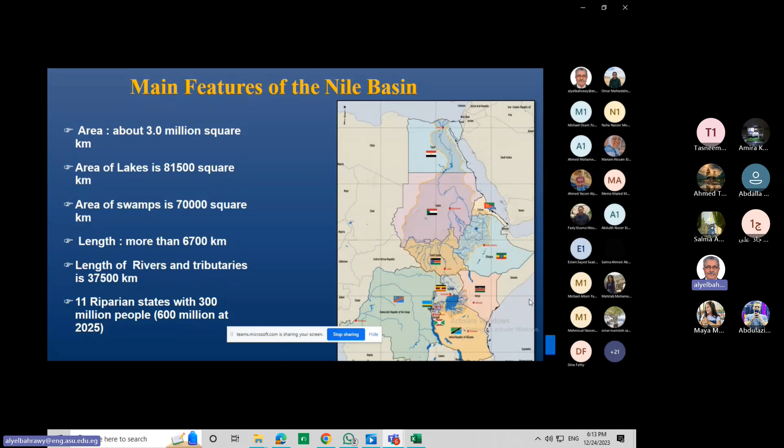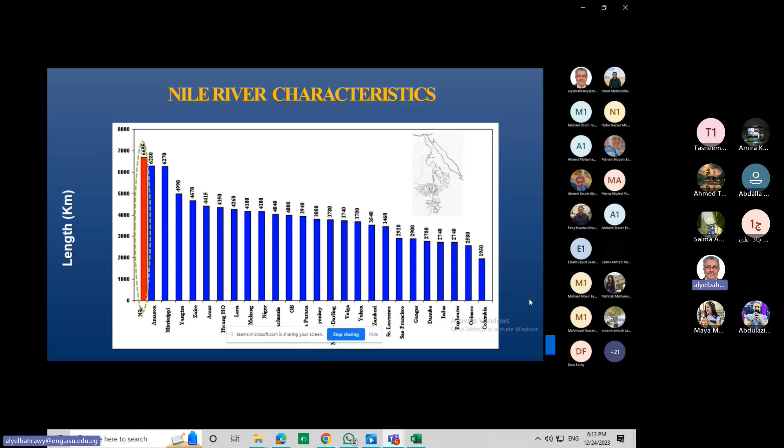Although the Nile is the longest river in the world, unfortunately, when it comes to the river discharge, it is among the least. We talk about 84 billion cubic meters coming in at Aswan.

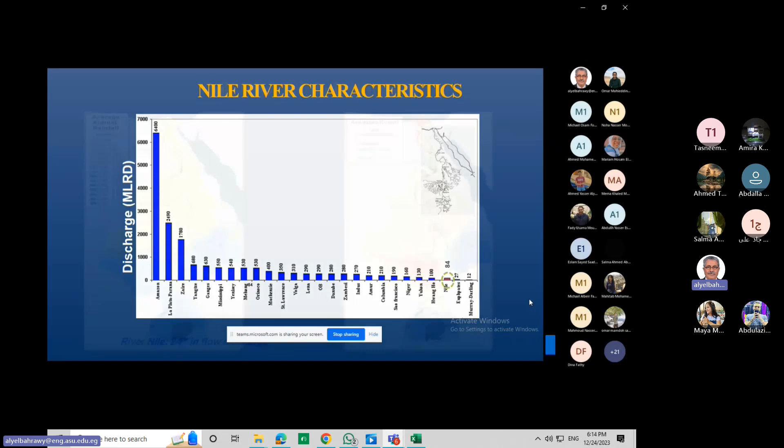We can call the Nile Basin a very complex basin. If we look at those two maps, we can understand why this complexity. On the left-hand side, when you see the Nile Basin map and the average annual rainfall, we find that there is a big discrepancy and a big variability in the rainfall. While Egypt and Sudan are almost dry with almost no rainfall, we find that the Blue Nile area in the Ethiopian highlands and the equatorial lakes plateau are very rainy.

So this puts different interests in the river. While we need the river for agriculture and for the livelihood of the people, the focus on this river in the upstream is more on hydropower development and hydropower production. This is one of the important factors of complexity of the Nile Basin.

At the right-hand side, we can see also the available runoff. We see that there are some swampy areas, and the runoff is low in the Nile Basin in Egypt, while we are mainly focusing on the rain in the Ethiopian plateau and the equatorial lakes plateau as well.

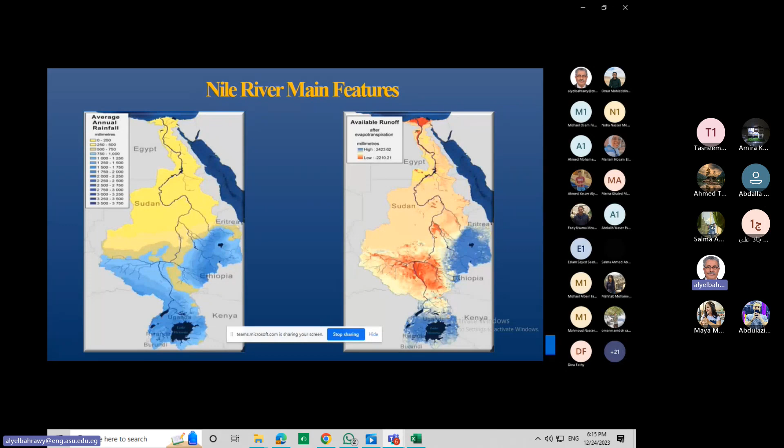Another factor of complexity is a term called the dependency ratio. This term is identified by the FAO, the Food and Agricultural Organization, as being the part of the total renewable water resources originating outside of the country. So it is the percentage of the external renewable water resources over the total renewable water resources.

In short, it explains how much you depend on water from outside of your borders. When you compare the Nile Basin countries, we find that Egypt has the highest dependency ratio, with 97% of its water coming from outside of its borders. While, for example, we find in a country like Ethiopia or Rwanda 0%, which means that they are controlling their own resources. They don't depend on water sources from outside of their borders.

And here, again, it explains the complexity of the basin, because we are not all at the same page with regards to the dependency ratio.

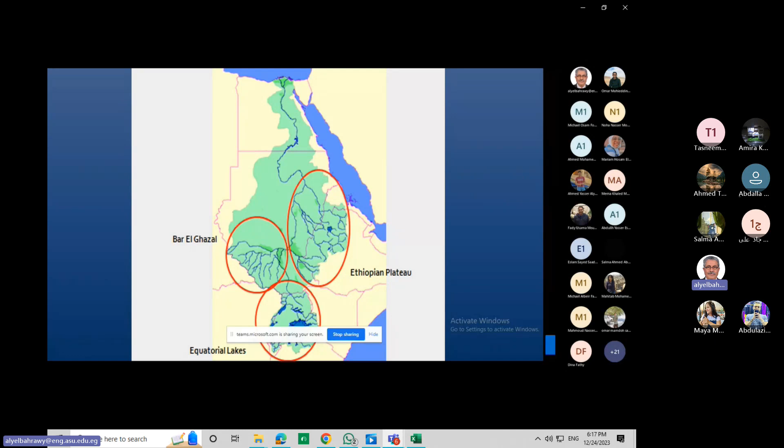This map explains the three main plateaus of the Nile Basin: the Ethiopian plateau, where the Blue Nile comes; the Equatorial Lakes Plateau in Lake Victoria and the Equatorial Lakes; and the Bahr el-Ghazal Plateau.

This table explains the water situation in the Nile Basin. In the Equatorial Lakes, for example, it receives a mean annual rainfall volume of about 527 billion cubic meters. From Bahr el-Ghazal we receive 544 billion cubic meters, and from the Ethiopian plateau, 1,076 billion cubic meters.

The mean annual rainfall volume at the Equatorial plateau is 527, but only 15 billion cubic meters flow into the Nile. In Bahr el-Ghazal, none of the rainfall volume flows into the Nile; it's all in the swampy areas of the Sud region. In the Ethiopian plateau, out of the 1,076 billion cubic meters that fall, only 79.5 billion cubic meters flow outside of the plateau. This is at the source of the basin.

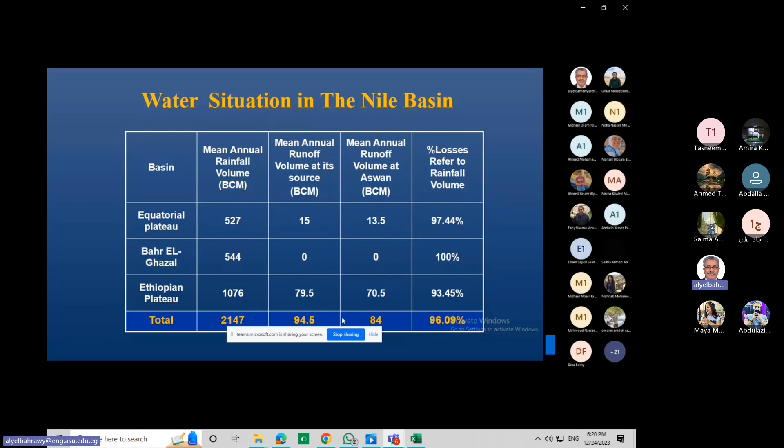Here we have to talk a little about green water and blue water. From what you have seen and what I said earlier, the blue water is the water flowing in the river, while the green water is the water coming from the rain.

From the schematic, you see that when rainfall falls, it makes a coverage of greens and food for livestock, and unfortunately all of this is not counted. What is always said in the media is that Egypt takes the lion's share of the Nile, while as I explained, Egypt takes only 4% of the water that comes, and all the rest of the rainfall is lost—actually it's not lost, because it goes onto the greens and is also infiltrated into the groundwater.

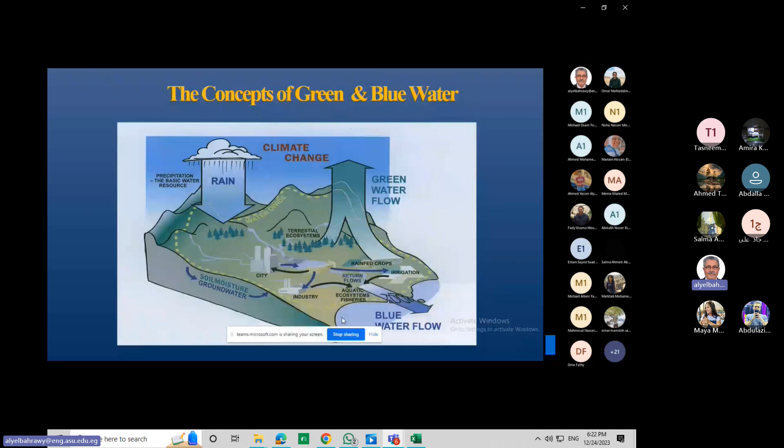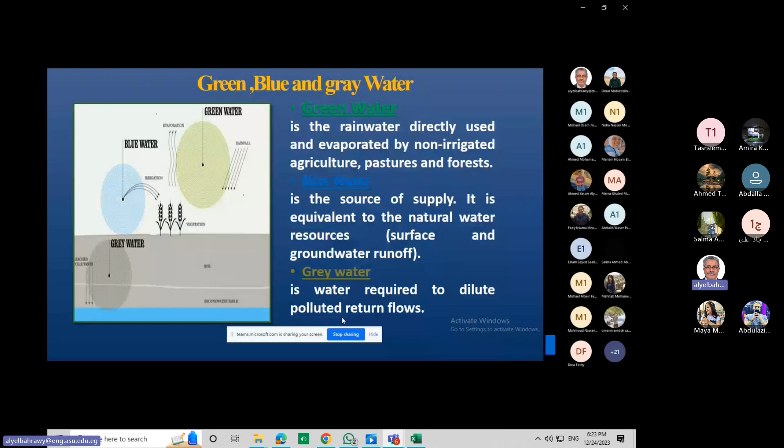This slide explains how green water is consumed in the Nile Basin—in forests, national parks, and greenery, all of this is green water. It is not counted, while it is a source of income and a very important economic resource for the Nile Basin.

Now, after this introduction to the situation of water resources in the Nile Basin, we'll talk about the evolution of regional and technical cooperation. The technical cooperation started with a project called HydroMet, followed by TECCONILE, the Nile Basin Initiative, and finally the VICMED project, on which we will concentrate.

The HydroMet project title is Hydrometeorological Survey of the catchments of Lakes Victoria, Kyoga, and Albert, and this project was assisted by two UN agencies. The participating governments of Rwanda, Burundi, and Congo requested to include the Lake Victoria catchment within Rwanda and Burundi, and Lake Albert in Congo. Ethiopia joined this project as an observer in 1971.

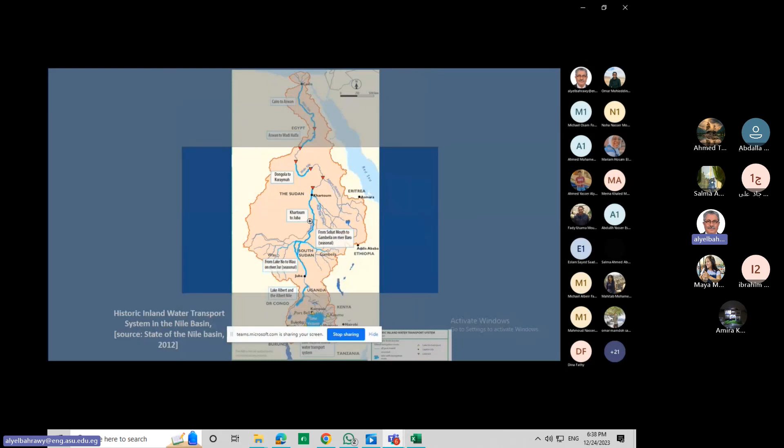Here we can also focus a little bit on the historic inland water transport and the main areas which are navigable. You will see them in light blue on the map, the navigable areas in the Nile Basin. The thin, deep blue lines are the non-navigable parts of the Nile.

I think we can skip the historical background, it will not be very interesting for you. This is how the project came into life.

Let's focus on the project components. This project's components will be a navigation route, inland waterways, ports and inland water intermodal ports, navigation works and structures like dredging, locks, and bridges, in order to make it navigable all the way, navigation fleets, transport operators, capacity building centers, and all of this will be managed by agreements and legal frameworks.

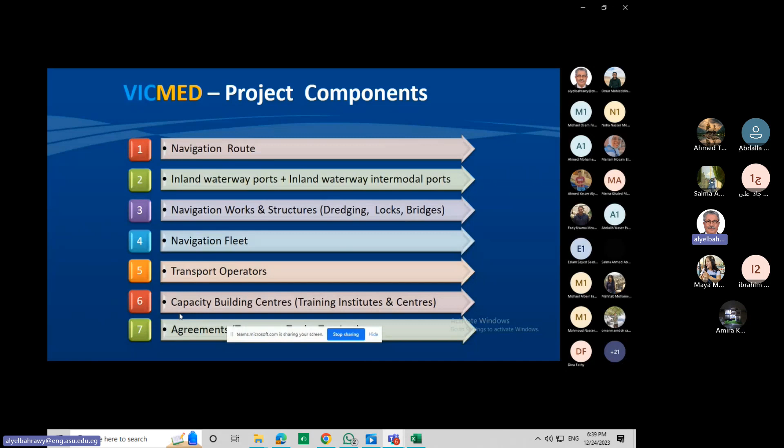The VICMED path is divided into 5 reaches, as you see on the map. The first reach is Lake Victoria and the Victoria Nile in Uganda. The second reach is the Great Lakes region: Burundi, Rwanda, DRC, and Uganda. The third is the Albert Nile until Malakal. The fourth reach is the White Nile and the main Nile in South Sudan and Sudan. And the fifth reach is the Egyptian Nile.

What are the main phases of this project? Because this project is actually a long-term project. You're talking about the navigability of the Nile, so it cannot be a very short-term project ending in one or two years. The pre-feasibility study of this project started in 2014, 2015.

The feasibility study has many phases. We have already completed the first phase, from 2015 to 2019. The second phase of the feasibility study, which we will elaborate on later, is divided into two parts. The first part should start from 2019, but until now it is still in preparation. Feasibility study phase 2, part 2, is to be determined once part 1 is finished, and then will come the design and implementation phase.

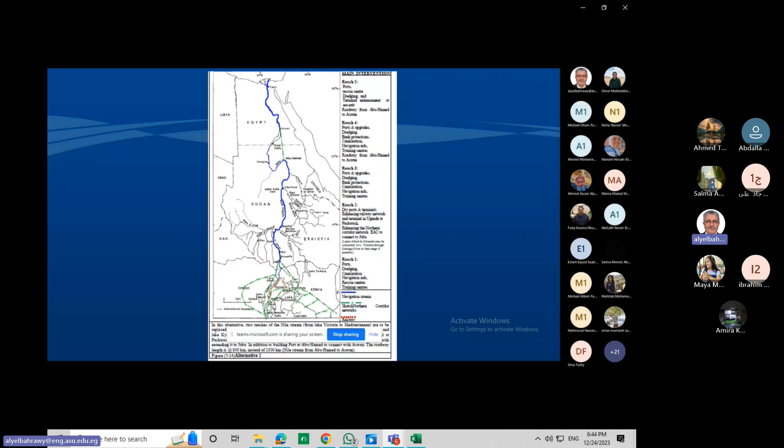All the alternatives are essentially about making some shortcuts or channels to shorten the trajectory, or to combine navigation with rail and road transport, which is the multimodal transport. So those are the alternatives to be elaborated later in the feasibility study.

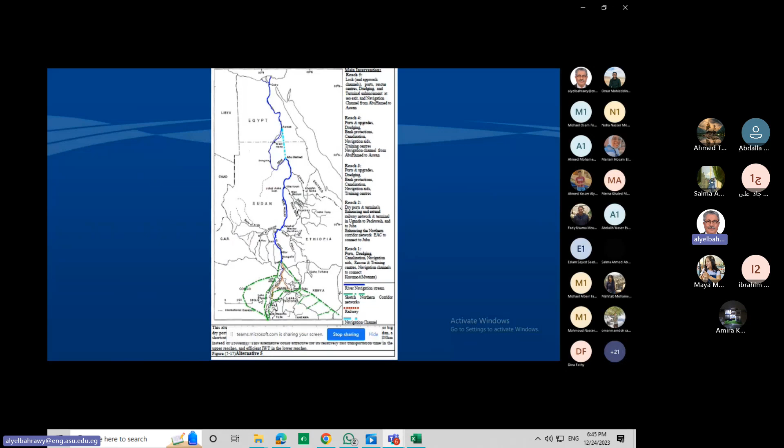Of course, like you have seen in the map, first of all it was the reach from Lake Victoria to the Mediterranean Sea. So the blue pathway of the Nile crosses Uganda, Sudan, South Sudan, and Egypt.

This is how the project is coordinated. We have a steering committee composed of high-level experts from the water sector and from the navigation or transport sector in all the Nile Basin countries. We have Egypt as the champion, so we have our focal point and the project management unit.

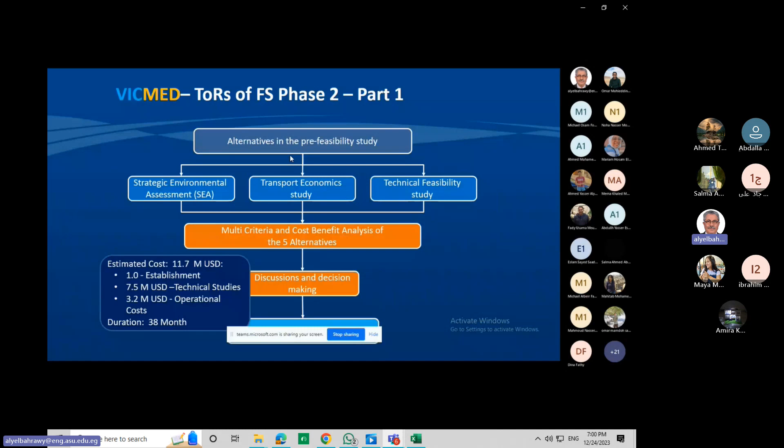The second part of phase 2 is to conduct a detailed strategic environmental and social assessment of the selected scenario. The estimated cost is $6 million, and the time required will be about 20 months.

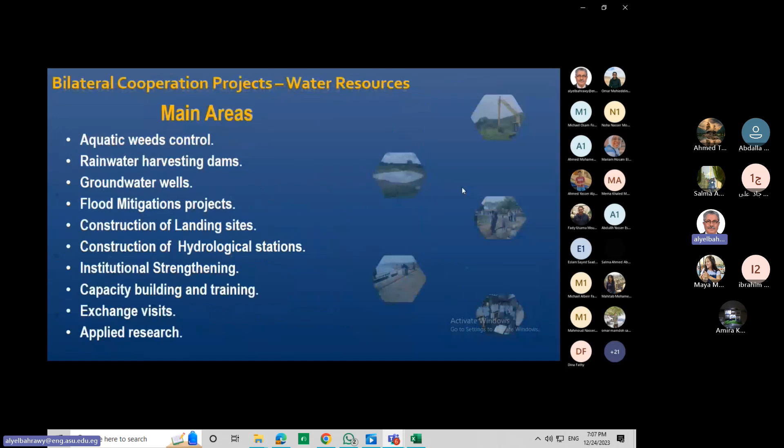The main areas are aquatic weeds control, and rainwater harvesting dams. Let me explain what rainwater harvesting dams are. Like you see in this picture, it's like a hole to collect rain coming to a specific area, instead of making damages, in order to serve people and livestock for irrigation and for livestock beverage as well.

To dig groundwater wells. We also have cooperation projects in flood mitigation, construction of landing sites and hydrological stations, institutional strengthening and capacity building, expertise exchange and applied research. So the cooperation is almost in all technical aspects.

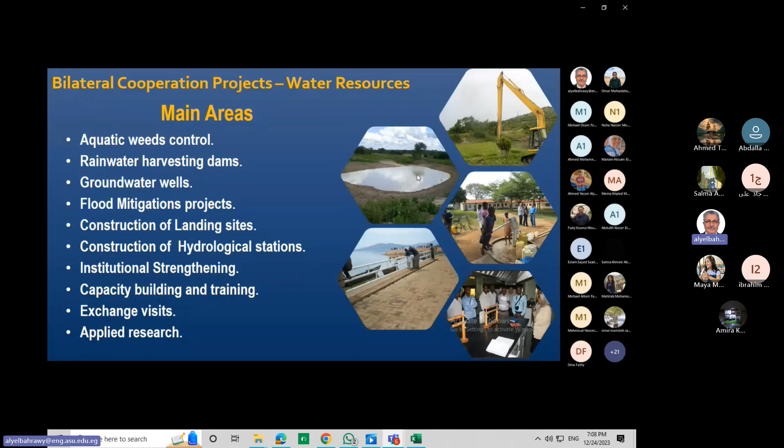How does this cooperation take place? It starts with an idea when any of the Nile Basin countries — and let me tell you it's not only specific to the Nile Basin countries, the Ministry of Water Resources also has cooperation agreements and protocols with many other African, Arab and European countries as well — sends an official letter with the requirements and needs.

Then it is followed by data collection and field visits to the country in order to specify the project's scope of work. Then there is a technical committee from both countries, one from the Ministry of Water Resources in Egypt and another from the country which has asked for the cooperation. Both committees meet together and start the formulation of an agreement, a protocol, or a memorandum of understanding and an action plan, and then the implementation of the project starts. So this is the roadmap, the procedures from the idea until we reach the implementation of the project.

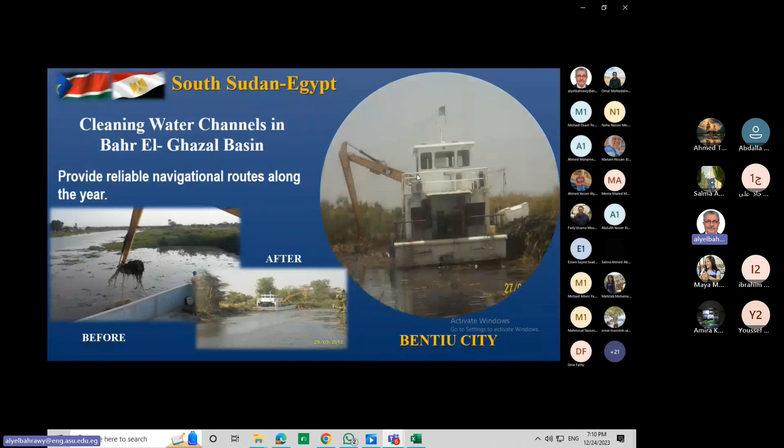These are some photos of the activities under this cooperation. Here we can see the before and after of the cleaning of water channels in Bahr el-Ghazal Basin, in order to provide reliable navigation routes throughout the year. We can find that the aquatic weeds are blocking the pathway of water, and afterwards we can see the aquatic weeds have been taken away from the waterway. Here it's also the cleaning of water channels in Bahr el-Ghazal — before, it's totally blocked with mud, and afterwards, the water is flowing freely.

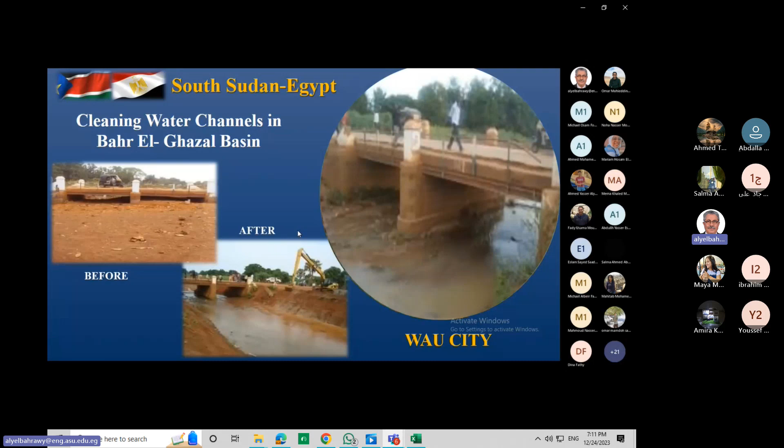It's also here they are making some innovation and rehabilitation of landing sites in Wau and in Kwajok in South Sudan, in 2019.

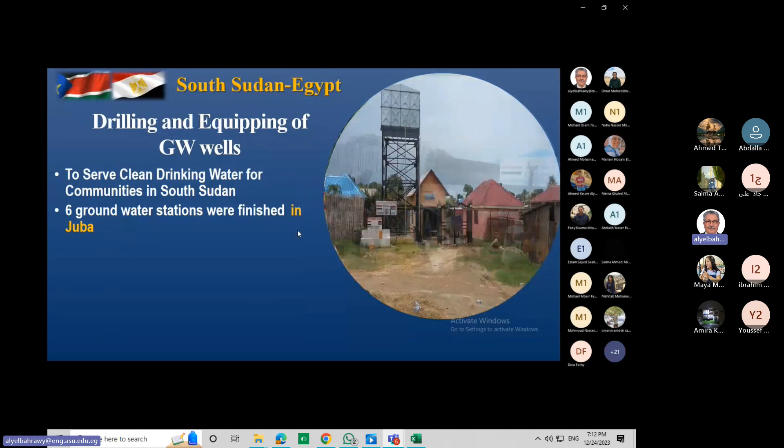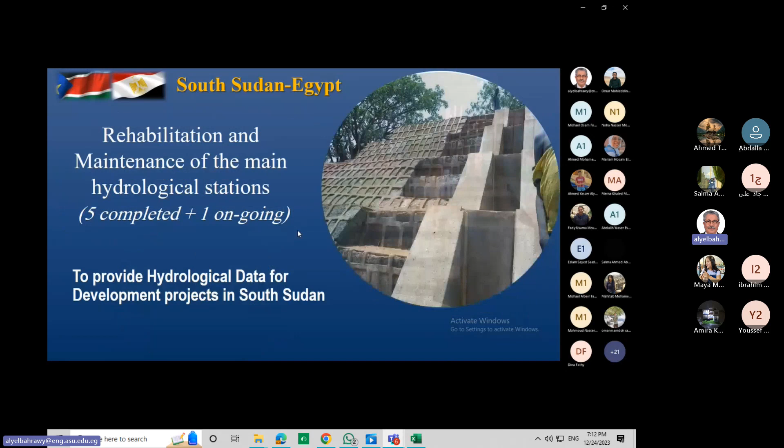Also drilling and equipping groundwater wells to serve clean drinking water for the communities in South Sudan. 6 groundwater stations were finished in Juba. The rehabilitation and maintenance of the main hydrological stations, 5 were completed and 1 is ongoing, to provide hydrological data for development projects in South Sudan. You can see here our technical staff with the South Sudanese technical staff on a field visit.

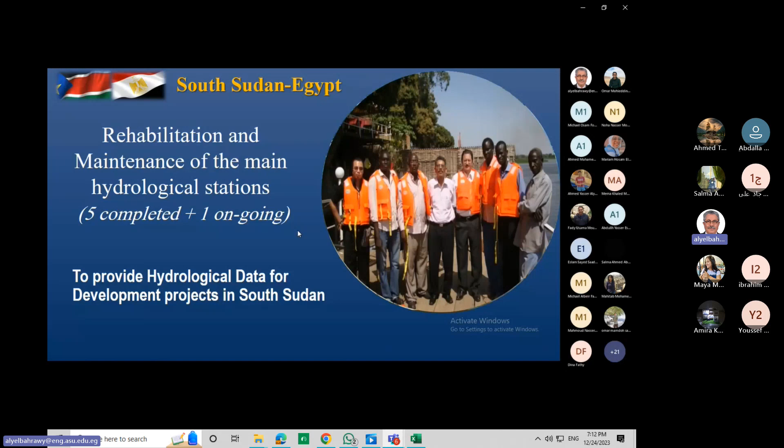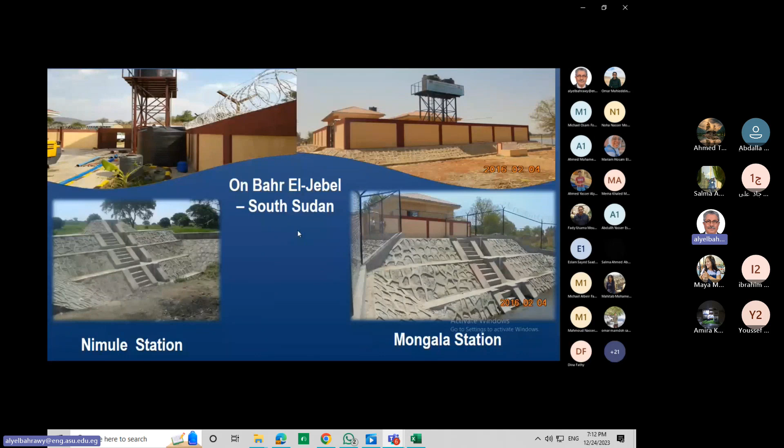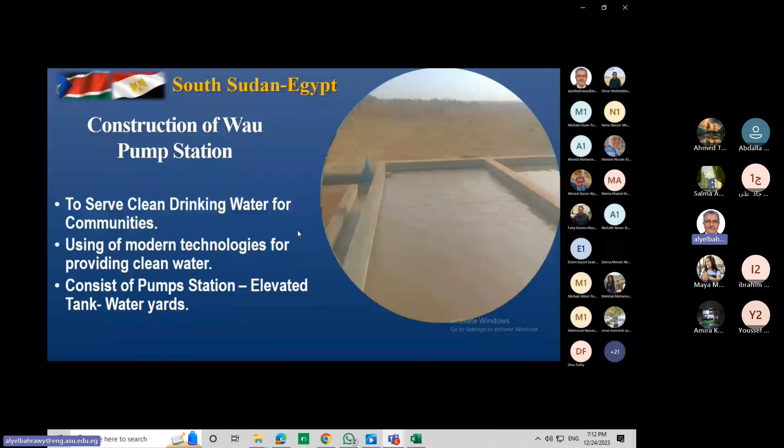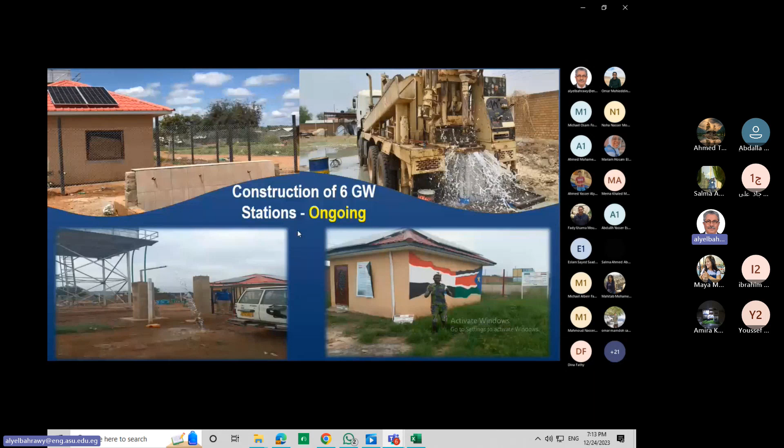On Bahr el-Jebel in South Sudan, we have also rehabilitation of the Mongala station and the Nimule station, and construction of the Wau pump station to serve clean drinking water for communities using modern technology, consisting of a pump station, elevated tank, and water yards. 6 groundwater wells are finished, and another 6 groundwater wells are ongoing. In South Sudan, we have 2 rainwater harvesting dams in Tonj and Gogrial to serve clean water for communities and livestock.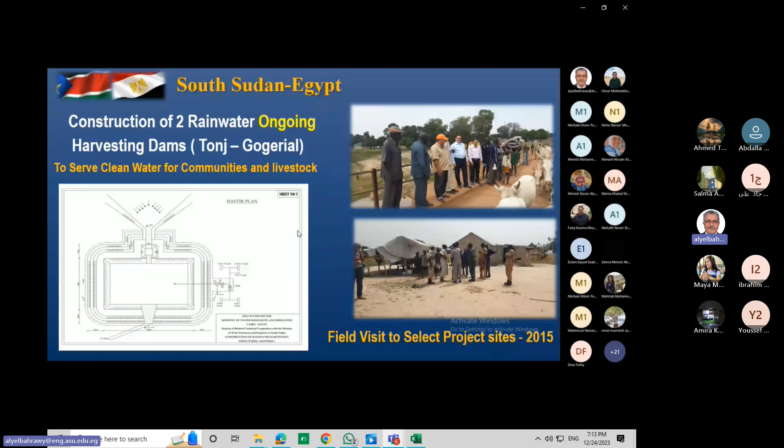Of course, on the political level, many exchange visits have taken place on both sides. Our ministers were there, their ministers were here at the Cairo Water Week lately, and between the minister and the prime minister in Egypt as well.

With Uganda, Uganda is one of the countries that has very big cooperation, including the aquatic weed control project and other projects in technical cooperation, and the integrated flood management in Kasese district.

I feel that we are approaching the end of our time. So please, Dr. Ali, tell me, should I move fast or should we end here to give some time? I suggest you give the students some time to ask questions, because they may have other commitments after the lecture.

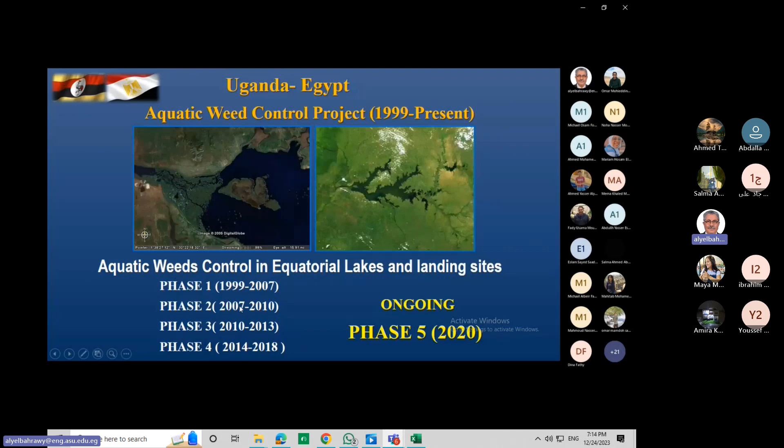Yes, so maybe I will stop at that, just to say that this aquatic weed control project is one of the most important ones, and many other bilateral projects are ongoing between Egypt and the Nile Basin countries. So with this, I'll stop sharing my screen and hand back to Dr. Ali.

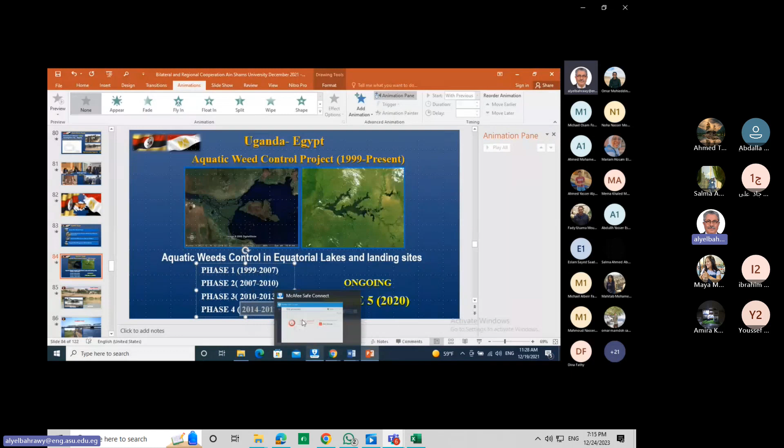Okay, I can see. Let us see now, I'm looking at the list. There was a hand raised, but I cannot see it now. Yeah, there was somebody who raised his hand some time ago, but he disappeared now.

Why don't I start the question session myself, Dr. Tahani. You mentioned South Sudan and Uganda. What other Nile Basin countries do we have strong bilateral cooperation with in terms of projects on the ground?

We have very strong cooperation with the DRC, the Democratic Republic of Congo. We have also high cooperation with Kenya. Uganda is on top, and South Sudan. Burundi is in the pipeline because we have just had some technical committee members visit Burundi last month, and they are starting cooperation as well. With Ethiopia, we have cooperation on the exchange of visits and on the scientific side. So we have cooperation with almost all the Nile Basin countries, at different levels of importance, of course.